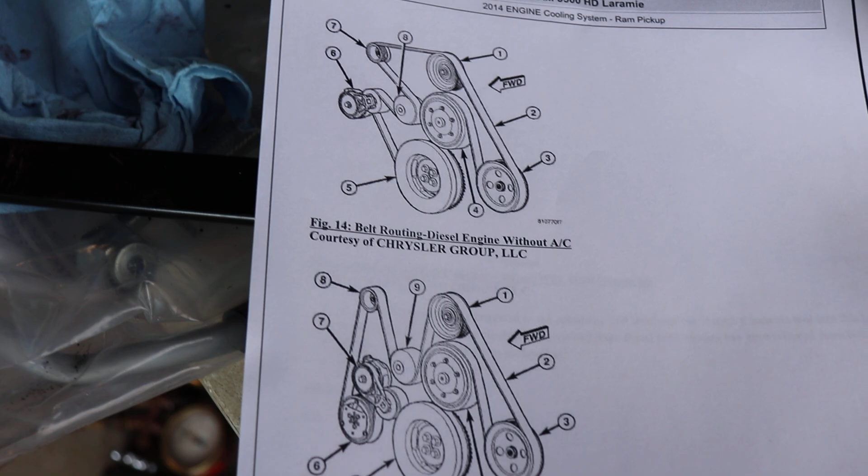So while I've got my truck apart, I've been trying to determine if it's possible to do the non-AC belt routing on an AC truck or not.

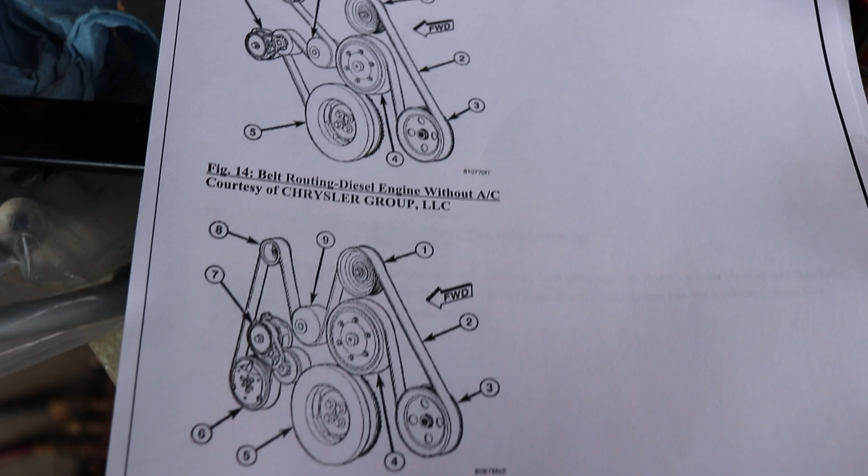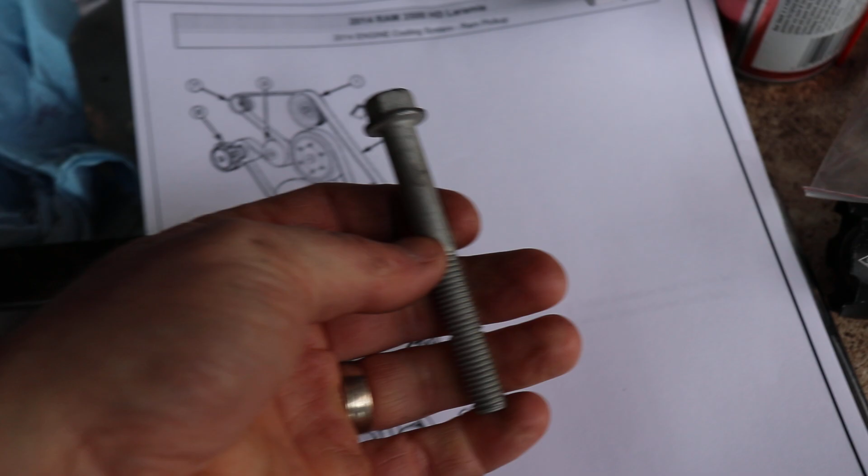So the tensioner is mounted on the water inlet bracket, and there's two sets of threaded holes and spots for the tensioner. The tensioner bolt goes through there, and there's an indexing pin to hold the tension as well, and then there'd be a bolt that goes into the inlet bracket.

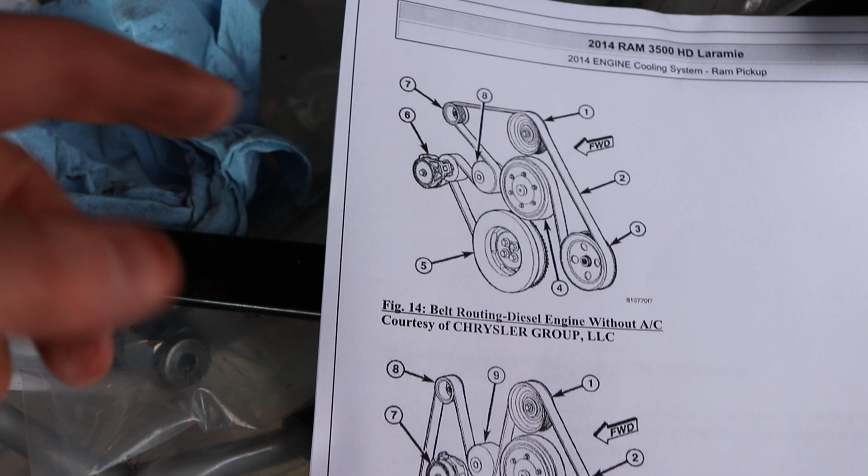So what I've been trying to figure out, like I said, is to see if you can go from this to this. They don't show any different parts on the parts searches for a non-AC truck. I don't know if they even exist or not, but there's a diagram for it.

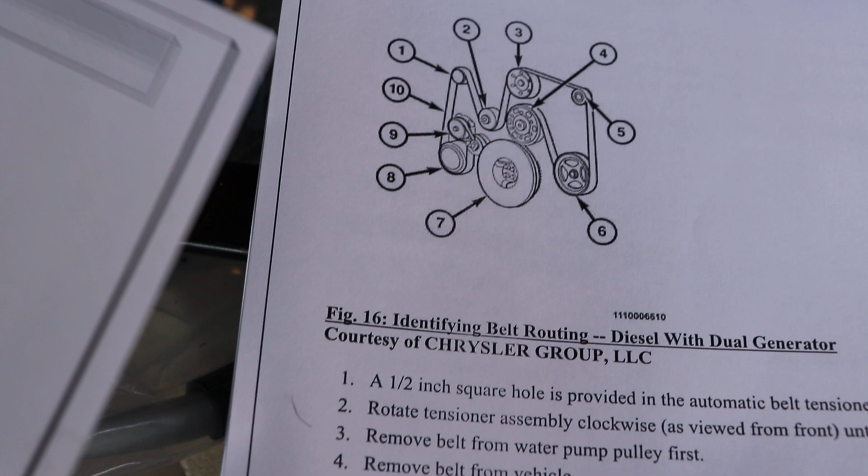And then if you've got a dual alternator truck, we'll get on to the next sheet here. They show the tensioner up against the crankshaft pulley pretty close, so it's the same as the AC system, and in fact it does have an AC compressor down there at the bottom.

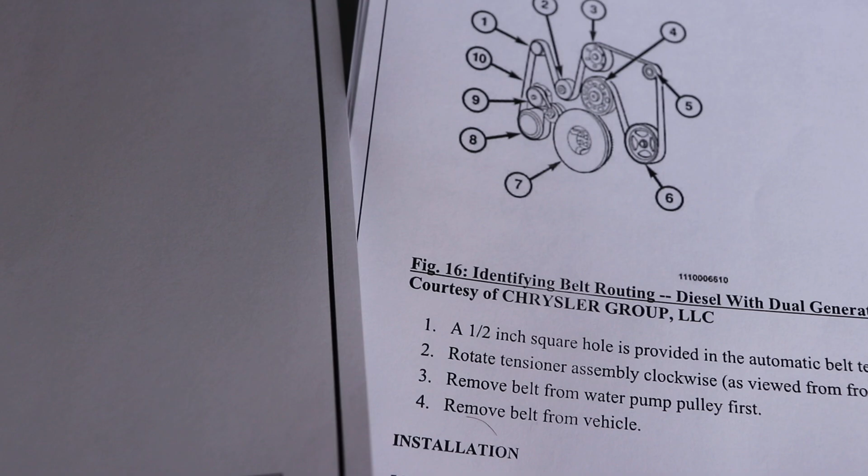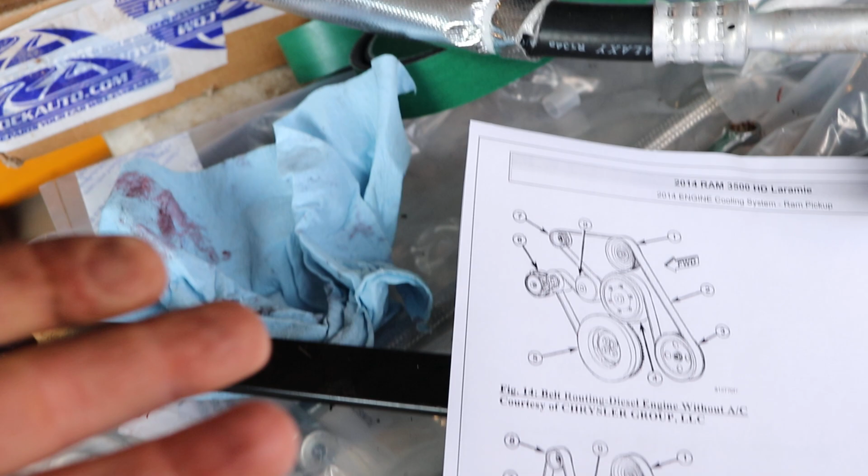So when you do put the tensioner in this position, the grooved part of the belt's going to be riding on a flat shaft, but that's sort of what it's looking at when I'm looking at it. So it looks like you're going to be pulling tension up and out.

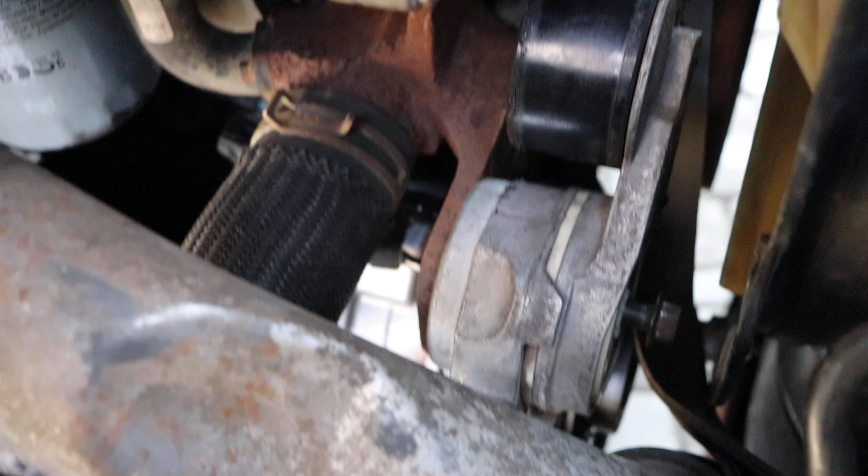So we'll take a look and see what I've got. I can't actually install it because the spare threaded hole is rusty on this truck. I don't have a tap to chase it, unfortunately, so I can only get it in so far. But in theory, you would pull the tensioner.

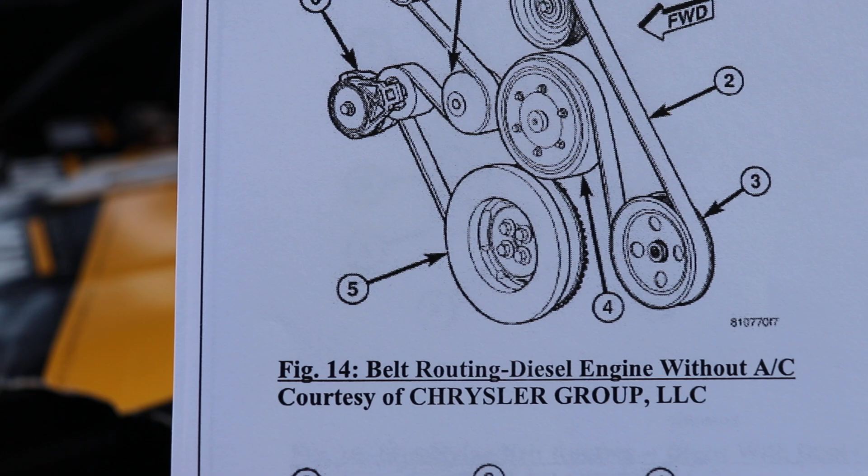It seems like the tensioner is in kind of the wrong spot to provide tension like that. It's kind of funny, they got the drawing on a bit of an angle. But yeah, so it needs to be pulling up and out in order to provide tension on the belt.

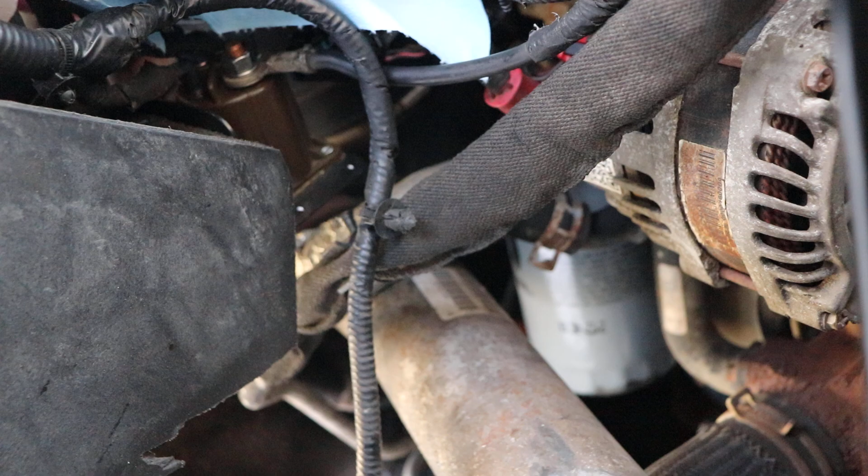So let me get my tool here. There's a 1/2 inch hole on this, so I need to get that on there. Let's put it that way, and then yeah, it'll be pushing out with tension. So it looks like that might actually work.

I wish I was able to put the belt on. I'm just changing the AC compressor right now, but it would have been my preference just to bypass the system. But I didn't come up with this information until it was kind of late, so just redoing the whole system. So I'm just putting this out here as a maybe video that might help you if you're in trouble. And if it does work out for anyone, I'd appreciate if you get back to me.

And yeah, we'll just take the tensioner off quickly.

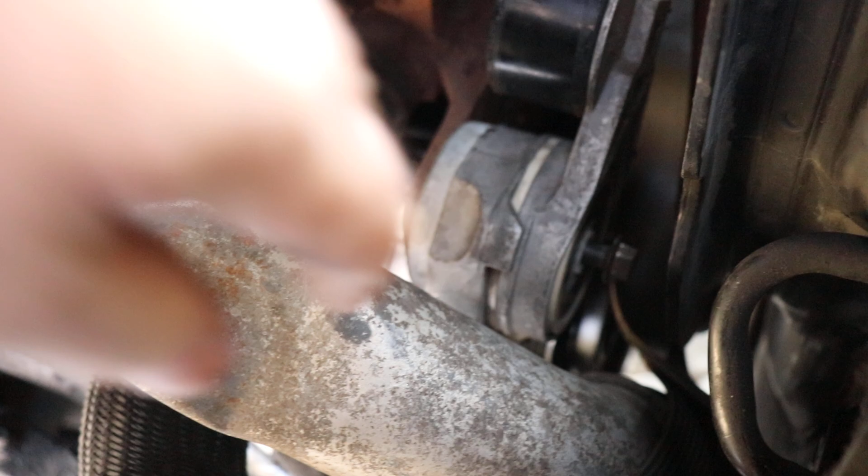So when you're putting on the belt, like normally for an AC truck, it's going to be using these two holes here. So there's a slot, then the threaded hole here, and then the way the tensioner sits, you kind of need to put the belt on first and then put on the tensioner, so that's the easiest way. Otherwise you got to turn the belt sideways and shimmy it in between everything. And so those two would be for the AC truck.

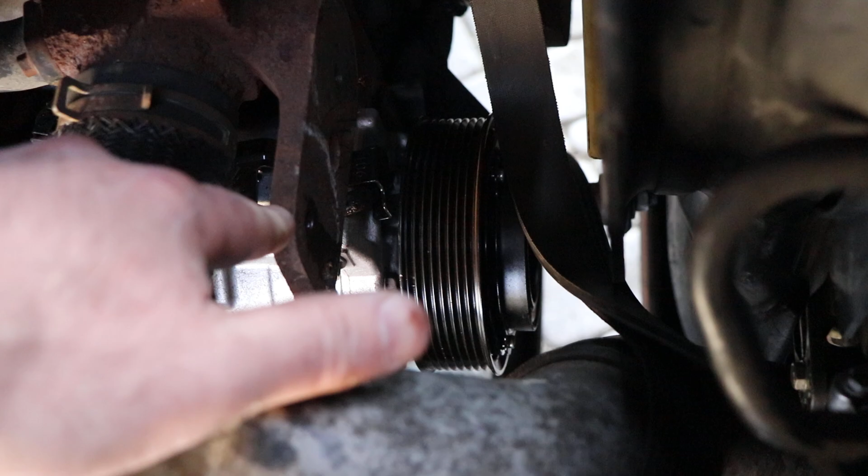And then these two further out on the ear, the top one is threaded and the bottom one is just an open hole. So it looks like if I could chase that thread out, I could have avoided replacing the AC system on the truck here for the time being, because it's winter. I don't need it now.

I would have preferred just to delay this work until later. But again, if anyone can tell me that this is a real thing, it's going to work, that would be awesome, because I couldn't find any really good information on the internet confirming that's possible. So anyway, thank you.